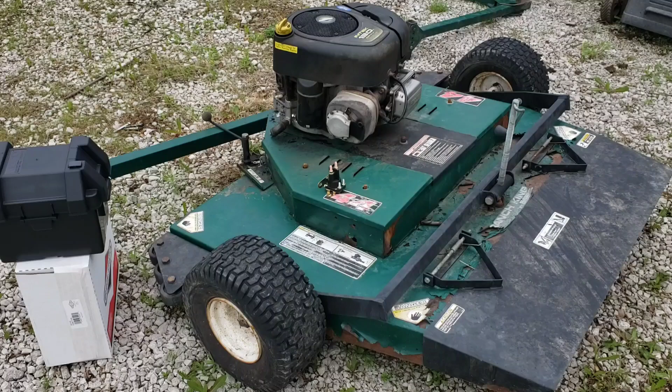Our $100 plastic gas tank and other parts just arrived moments ago. So I wanted to go ahead and turn on the camera and we'll kind of lay out our fitment before we start assembling things. So one thing I know for sure that we had to do, I actually forgot until now, but we need to turn this.

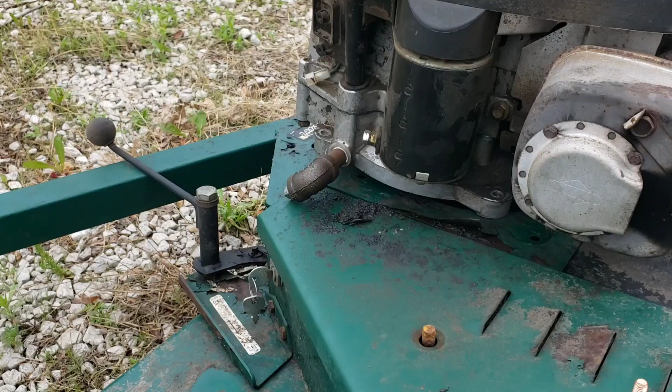I'll grab a crescent wrench and turn our oil drain up just a little bit, because as you can see, it's turned down to where the motor won't sit flat. So let me run and grab a crescent wrench and we'll do that quick. Nice, no big deal on that.

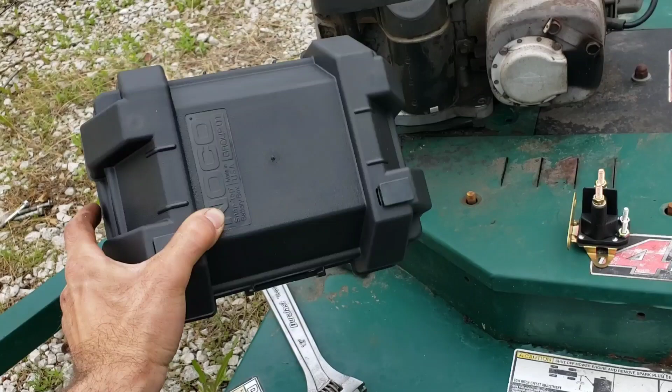So the first thing I wanted to take a look at, obviously we got our battery box here. Unfortunately, they had a cooler, kind of sleeker looking one, and it was sold out. So I had to go with this one. It's a little clunky, but we're kind of looking for function over form on this machine anyway. Also got our pulley, which I'm hoping fits. And then, of course, our $100 gas tank.

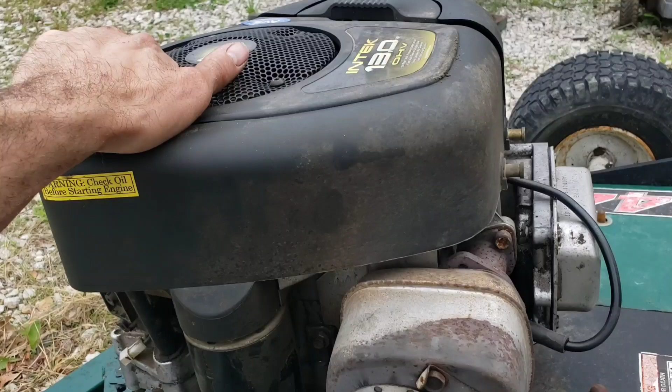So what I wanted to do is, I'll open up the pulley here. Start by seeing if I measured correctly whether it fits or not. I think it's a 1/4 inch bigger OD than the original pulley. Shouldn't be too big of a deal, as long as there's enough slack in the belt for it not to run all the time. But I did that because the only other option that was exact to size was a different style of pulley where it didn't have this strong shoulder and set screw, and so that wouldn't have worked for us because we have to have that.

Alright, let's see if I can tip this thing back one-handed without knocking it off. So let me set you here a second. I don't have much to set you on at the moment. Hold on one second, sorry.

Okay. So the pulley is perfect. It slides right on. All we need to do is pick up a key. I think I've got a key that size in my key drawer, and lock it on. So that's going to be great. And what we'll do is take the side panel off to set the height so that the belt's tracking appropriately, and then we'll lock down the set screws. So item number 1, check.

Let's move on to the $100 tank. Okay, let's see if we can do this without a knife. I think I mentioned on the last episode what I'm going to do to save about $25 or $30 is make my own mounting bolts for this. What it is, basically, a head bolt with a stud sticking out of the end.

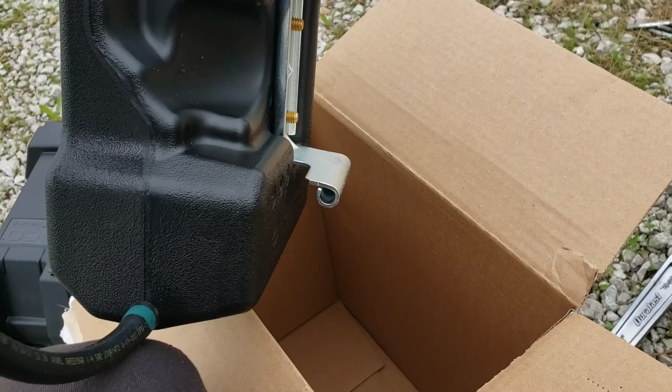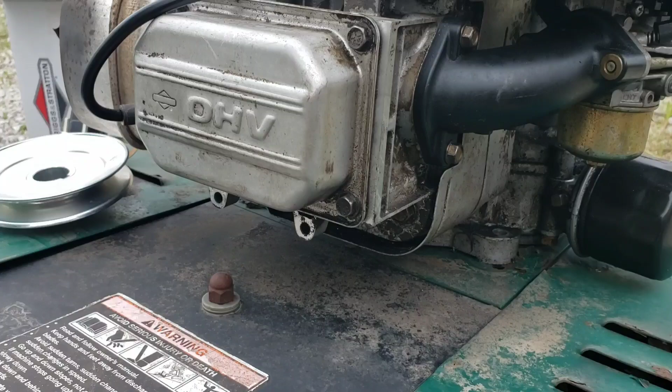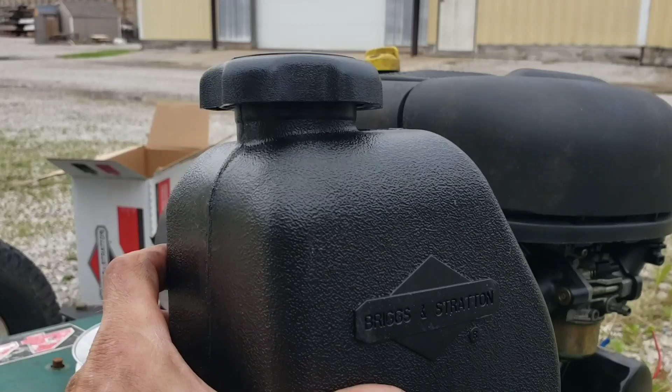And so the way that it mounts is the 2 studs go through these 2 slots on this mounting bracket, and then the other end of the bolt is an existing head bolt. So what we're looking at should be this head bolt and this head bolt. We'll just get a stud welded onto the end of them, maybe like a 5/16 stud or something. So let's see, moment of truth, whether this is going to line up appropriately.

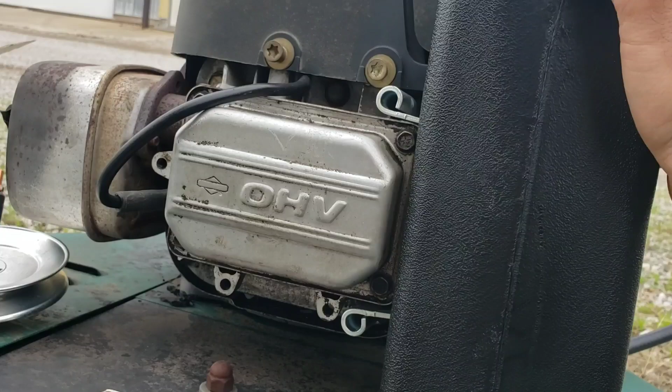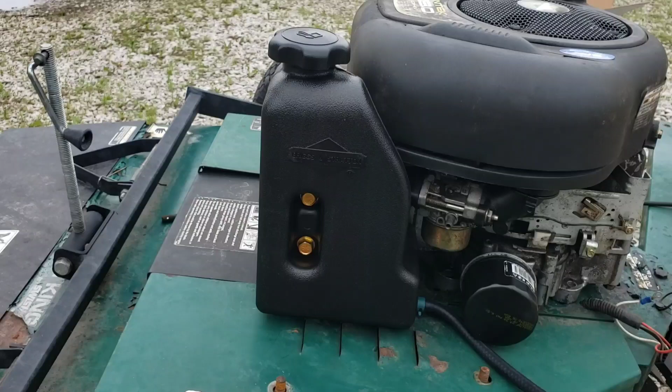Oh, that's great. Looks like it's going to be perfect. So let me just kind of set that in there to mock it up for looks. So that's how that looks. I had kind of misspoken on the last episode, thinking that these 2 bolts were the mounting bolts into where the intake is at. That's close to the right idea, but obviously that's not exactly how it works.

So then what we would do is, this is meant to run with a fuel pump, because this engine was originally a gravity feed setup. It had the tank up above it, and then that came down, so there was no need for a fuel pump. We're going to need to add a fuel pump, and I've got one. I just need to kind of look around and make sure I've got all the right fittings to make it work.

But we'll just rob a fuel pump, and we can go take a look at my engine pile. And so what this will do is run up. Those fuel pumps have 3 barbs on them. One is your pulse barb that runs off of engine vacuum. Or I shouldn't say engine vacuum, because it's not really what it is, but it's your PCV line, because the engine is going up and down with air, in and out, in and out, as the piston moves. And what that's doing is actuating a diaphragm pump to make it pump.

So what you've got on those 3 barb pumps is your pulse line, your in and your out. So this would be our in, because it's supplying our fuel. Our out would come back down and run to the carburetor, and then our pulse line typically runs off of the valve cover, I think. I can't remember exactly for some reason on camera right now. That, or it runs off of there's a little pulse option on the intake, but we can go over and take a look at what I've got. Looks like that's bent. Get that fixed.

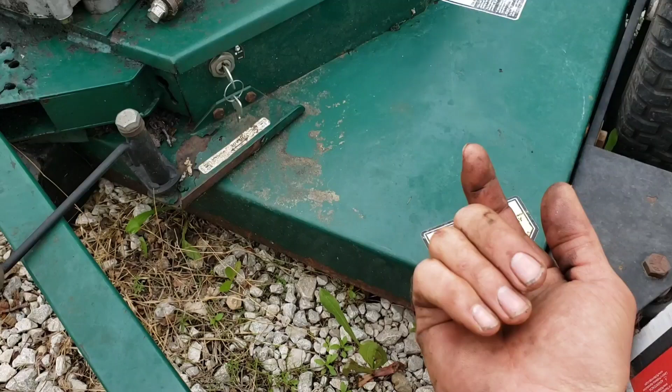Okay, so next thing to take a look at is our battery box. What I hadn't considered is that now that we have this tank up here, that's taking up some space where our battery box might have gone. So I hope we didn't screw that up. We obviously can't put it over on this side because we've got exhaust. I don't think it'll fit in here, and I don't want to put it down here because we've got spinning blades. I suppose we could, and then we could run a carriage bolt up from the bottom, so it's no big deal. And that might be kind of the slickest way to do it, is just have it sit down here.

Actually, I kind of like that. I like that it keeps the height lower, keeps it away from the exhaust, and it keeps it off of these panels where if we need to remove those to work on the belt or replace it or do whatever, it's not in the way. So that's one option. Right in here, either direction. That's kind of slick.

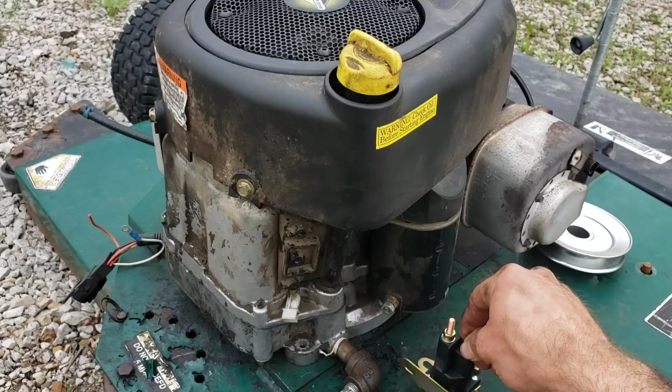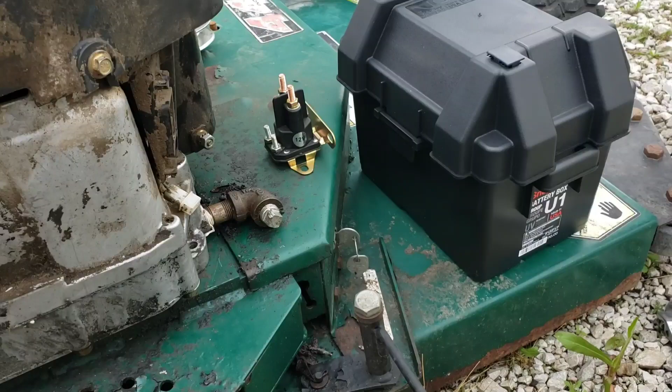That would keep the cables the shortest, because what we would do is put our solenoid probably right in there. I even had thoughts of mounting the solenoid to the box, but there's really no reason to do that. So if we mounted that there, we'd have a nice short positive to here and positive to there on the starter. We'd have our key switch right here, and it would all be nice and short. If I ran it over here for no reason, we're having to crisscross all of our cables. So I think the obvious answer is to go here and have our battery on the same side, so everything is nice and easy.

So that's kind of how things are shaping up at the moment. So remaining items, welding up the mounting bolts for the fuel tank and a fuel pump. Those are the remaining parts that we need to come up with, other than electrical, a key switch and some cable. So let's go over to the engine pile over there, and I'll kind of point out what my thoughts are on the fuel pump.

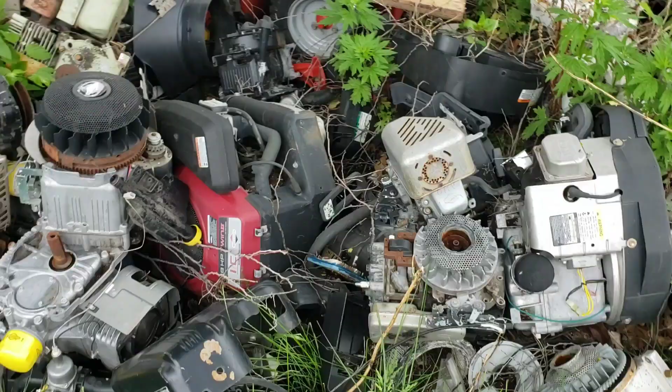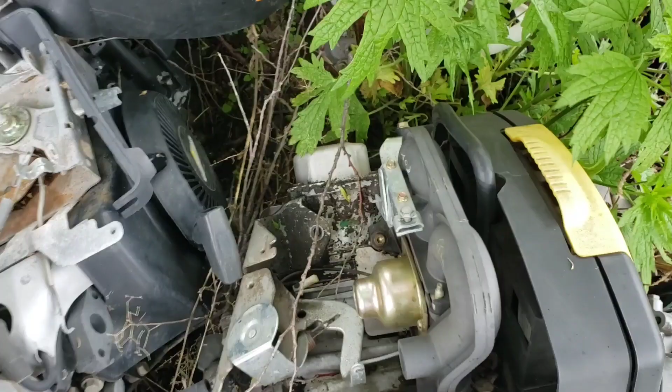Okay, welcome to the graveyard. So a lot of what I have out here are these Briggs V-twins, and the way that these operate is right off of the valve cover here. There's a hole, and that runs up, and that runs the pump, and then your inlet and outlet there. That's not going to work for us because we don't have a V-twin with this style of valve cover, so we can't just swap the valve cover, because on a 1-cylinder it's actually wider. It's a different shape altogether. We could drill a hole in it, but then I don't have that correct length of line to run.

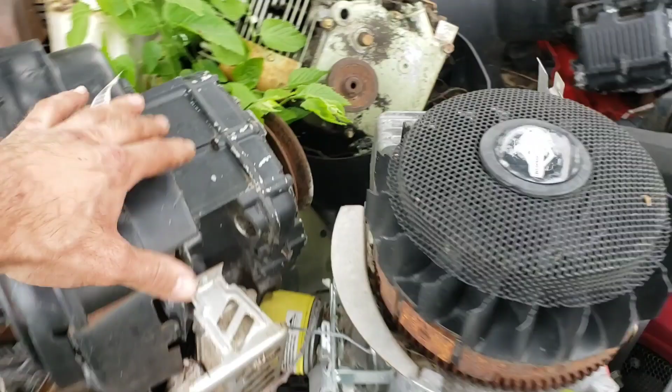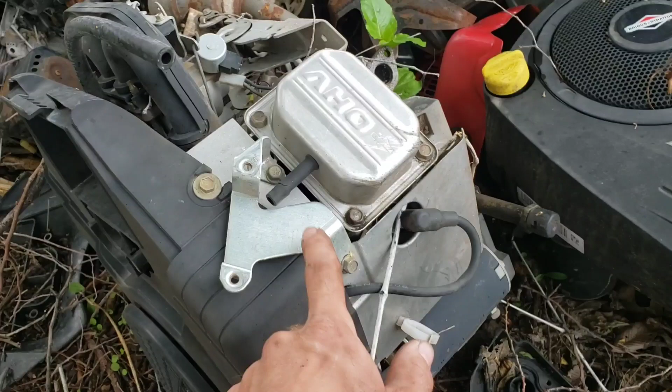So let me try and find a single cylinder with the same design. Here's a single cylinder. What would that have been? It's hard saying with the shroud and everything missing. Here's a single cylinder Intech. Another 2-cylinder, that's that short line I'm talking about. Fuel pump sits right here, but unfortunately not an option. So let's see what this Intech had going on.

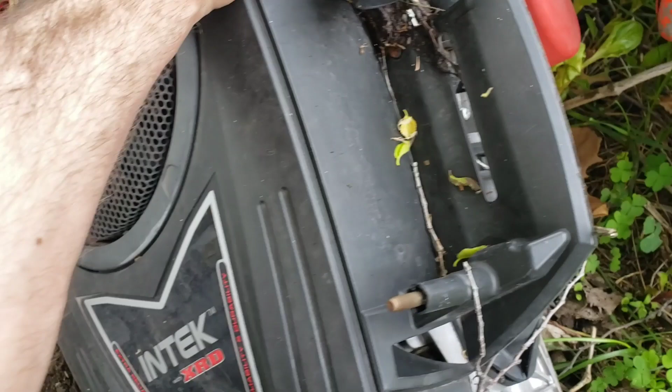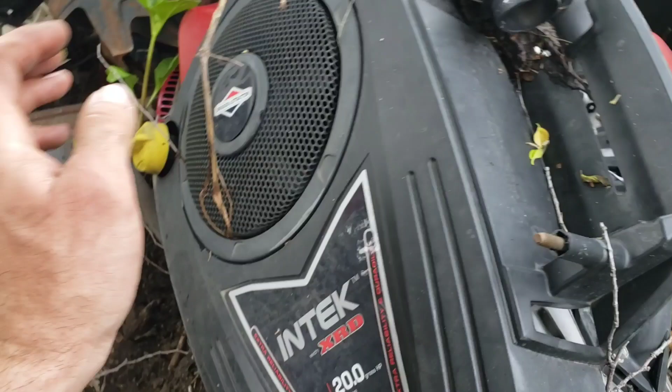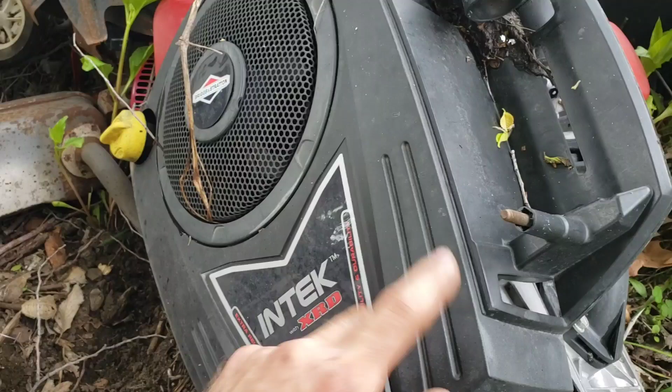That was also gravity feed, because where the pump would normally mount, there's factory plugs in there. So this one was not in use. I might need to pull up a diagram, because for some reason at the moment I can't remember how that works. There's another V-twin valve cover looking at us. Yeah, I might do that. I'll get a number off of this, as well as our engine over on the tow-behind mower, and we'll do a comparison to see how these were run exactly, see if we can make it happen.

Alright, I don't want to bore you with too much looking around on the computer, but this is the parts diagram for that engine that we were just looking at out in the pile, and I'm reminded now of the way that it's done. So the oil dipstick tube has a small barb on it right there. That's where the vacuum is had for the fuel pump on that style.

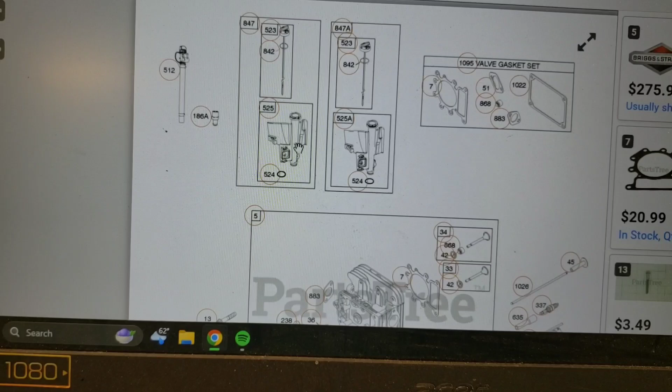So I want to go back out and look at two things. One would be whether the one out there in the pile has that and it's capped off, or if it's just got the standard style. Then I also want to look at our Intech on the mower and see if it has it. And then in either case, we'll come back in and compare the part number for that.

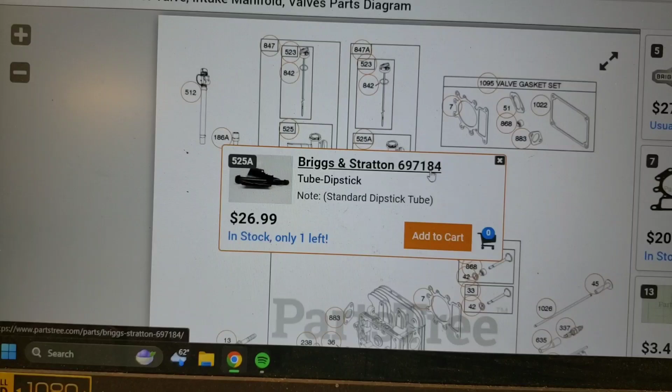It won't matter whether it's this one or that one. This one's obsolete at the moment. But we'll compare this 697184 from the parts pile to our mower engine to make sure it's going to fit. And we may end up having to order one. But anyway, we'll head out there and take a look.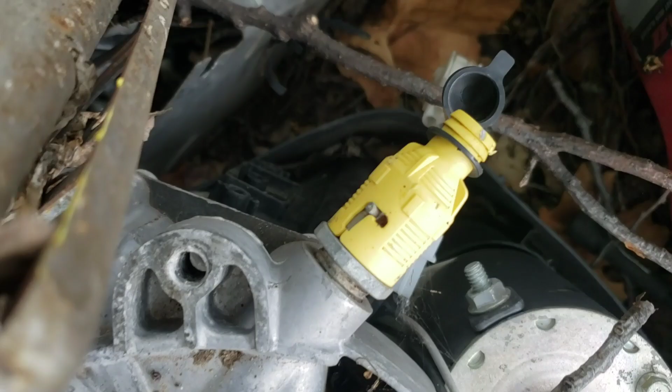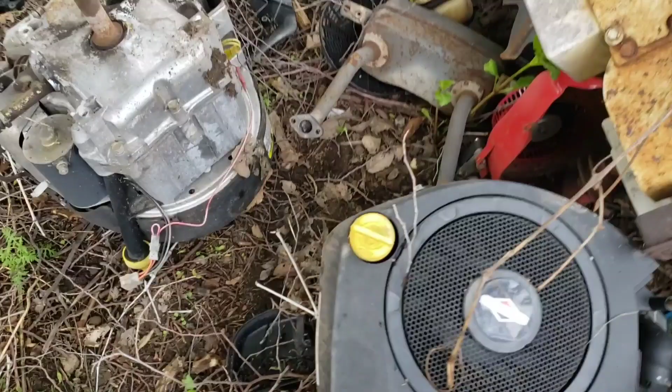Well, sadly, taking a look here, this one does not have the inlet. That's one Intek. That one does not have the inlet. And then I've got that other Intek we were looking at over here. Also does not have it. So I'm going to dig around a little bit more, but I'm worried that I might not have it because it's a pretty unique option.

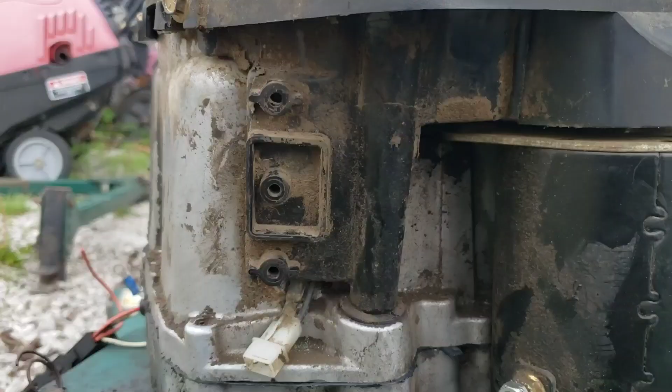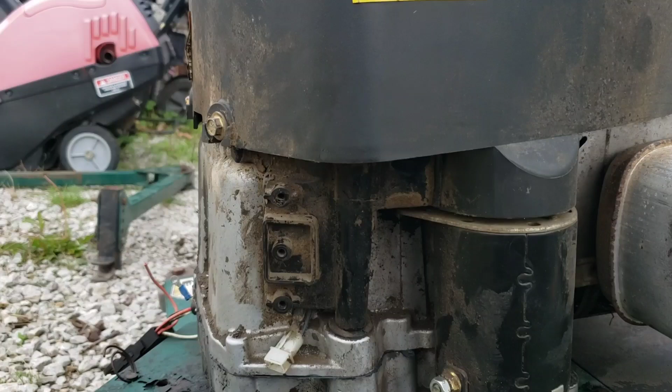I do feel pretty good that it would fit, and we can confirm this on the parts diagram, but just taking a look at it, here's a look at this one, and then I'll take you over. I'm going to cut the camera, but I'll take you over to compare to our new engine. And here's that comparison to our engine. So let's go in and confirm with part numbers, and we'll go ahead and end the video after that point. Hopefully it matches up and we can just get one ordered and it won't cost $100. So I'll see you inside for one more look at that.

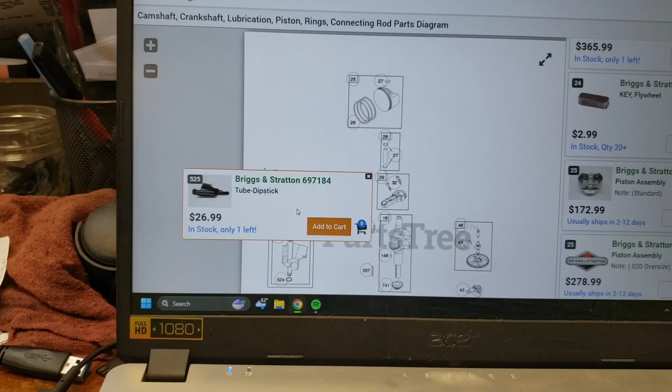I don't know why, but every diagram is blocking me out from viewing the dipstick tube with the barb on it. I guess if we had to, we could make our own. Drill a hole and thread in a plastic barb, put some epoxy on it, that kind of thing. If I can't get one, that's what we'll do.

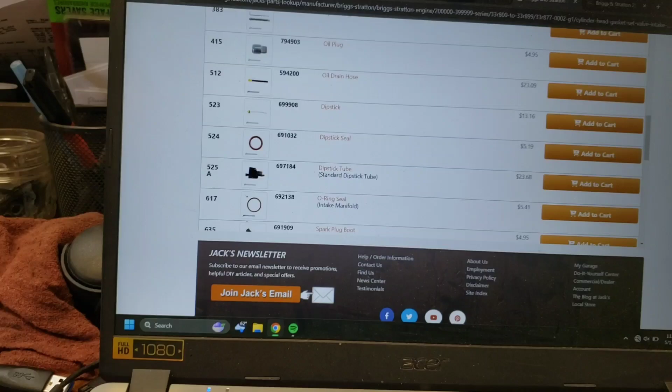Anyway, here's on our engine. It's a 697184, and on the parts pile engine that has the barb option, 697184. So that's going to be the ticket. I'll do some digging around and try to find one with a barb cheap. If it's either unavailable or too expensive, we'll make our own, and I'll show you that if that's the case on the next video. So we're getting close, but as with anything, it takes time trying to get all these parts to work together.